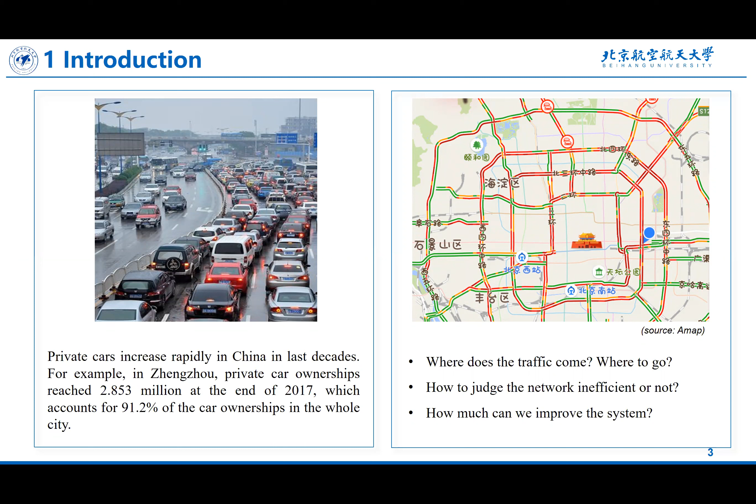Measuring OD level and citywide efficiency is helpful for managers to improve transportation planning, but it may not be realistic to improve efficiency for all OD pairs in the whole city. It's more reasonable to allocate a limited budget or resources to selected OD pairs, but how to select them, how to assign the resources?

From the system perspective, it may not be wise to induce demand for the most inefficient OD pairs directly. Just like playing pool, we usually don't kick the ball closest to the pocket—we need to calculate the angle and spin and think about the response of all the balls, hoping for more than one pot with just one shot. Based on this, we need to think carefully and choose a point to kick.

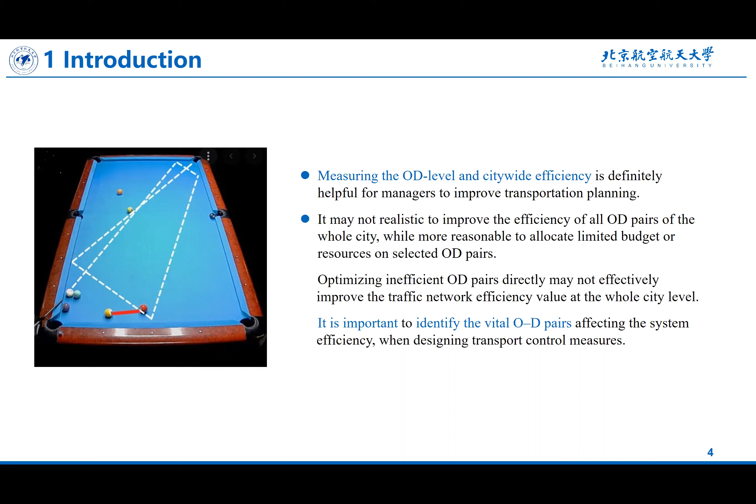In the traffic system, it's also important to identify the vital OD pairs or key OD pairs affecting system efficiency when designing traffic control measures. Here, vital means affecting the system the most, so we can do the least coordination work and achieve the most improvement of the system.

The existing work in the literature can be organized into two streams. The first is a commonly used framework called the excess commuting approach. It represents the additional commute, meaning how much excess is in the actual cost used. It is a ratio, as shown at the top. We have many extensions, like considering the maximum commute or the random commute.

The second stream is transportation network efficiency. It measures both the OD level and the citywide transportation efficiency by integrating the above excess commuting framework. Our work is based on these two frameworks.

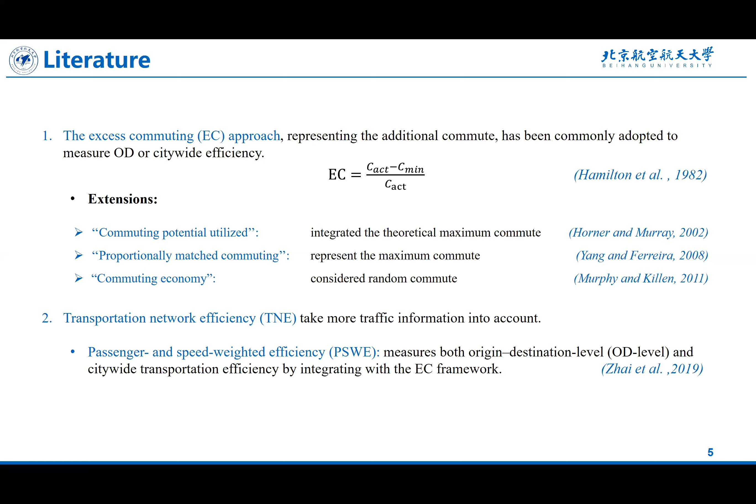The contribution of our work can be organized as follows: first, our study develops existing methods based on the EC framework to measure the OD level and citywide travel efficiency. We also proposed a new index to further identify the vital OD pairs for network improvement.

We used private car data in Zhengzhou to conduct the assessment. From the experimental results, we can see that the vital OD pairs do not coincide with the inefficient OD pairs. So from a system perspective, it is not wise to induce demand for the most inefficient OD pairs directly. We need to choose.

We also provide an analysis on the characteristics of these inefficient OD pairs to find the possible reasons for the vital inefficiencies from the perspective of land use. The results of this paper can help us design more targeted traffic management measures and urban land planning schemes to improve the efficiency of the traffic network.

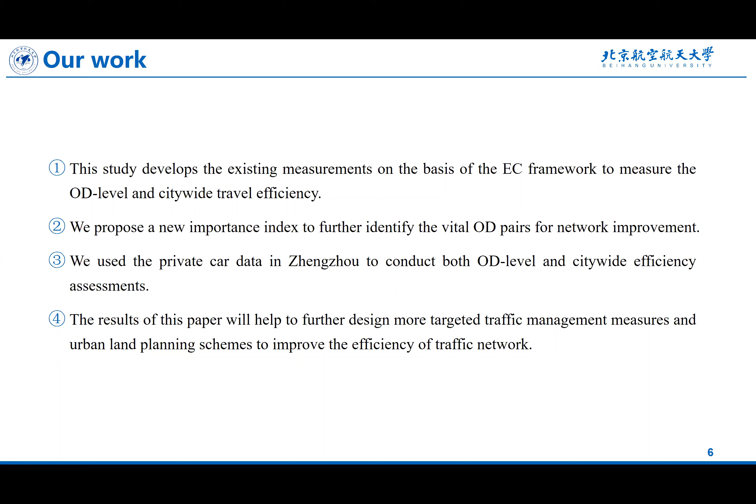The second part is about the data. First, Zhengzhou city is the capital of Henan province. On the map, it's located around the center of China.

The red point is the city, and it is 7,446 square kilometers in area, with 9.88 million in population. So you can see it is a very big city.

The data collected is in the gray part below. It's a built-up area with dense populations, consisting of three parts. Area A is the main urban area within the belt freeway of the city. Area B is Longhu town, a newly built-up area. Area C is the airport area.

Our data was collected from the 5th Urban Comprehensive Transportation Survey of Zhengzhou city. We have specific OD information for private cars on working days, around 25 days of data in 2017, collected from over 30,000 households.

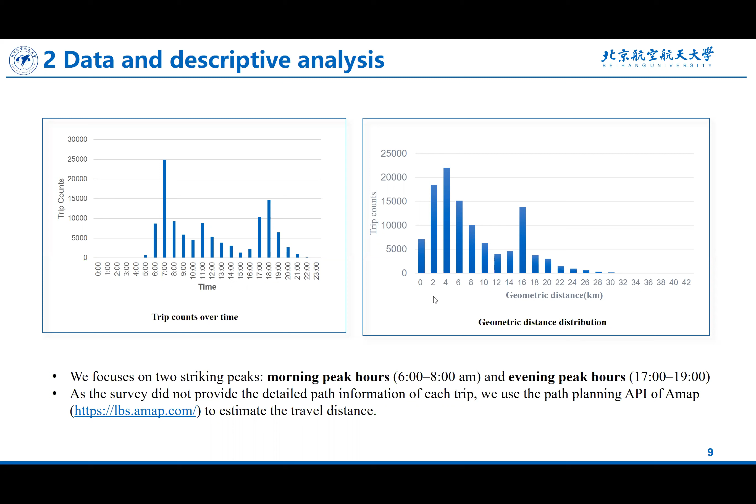Then we do the traffic zone partition in 2 steps. Step 1: we first divide the main urban area into 26 medium-sized zones by urban expressways and rivers. Step 2: we further divide the main urban area so that inter-zone trips are within a certain threshold.

As shown in the previous slide, the majority of trips are over 2 kilometers, so in the center part, the length of the zone is about 2 kilometers, such that the inter-zone trips are within 10%.

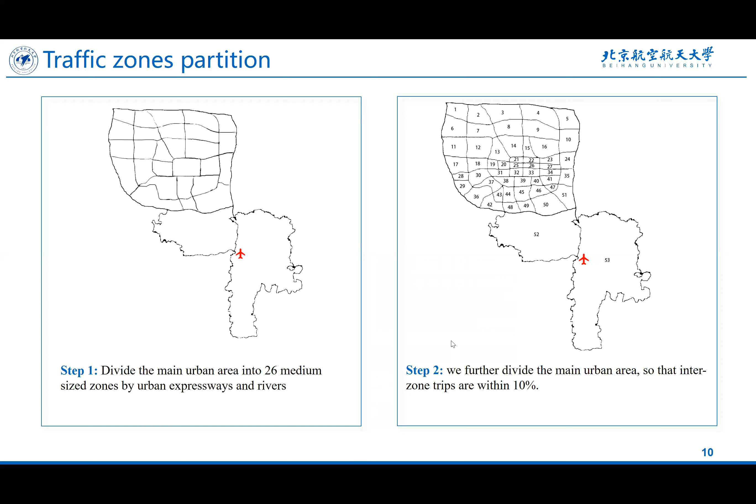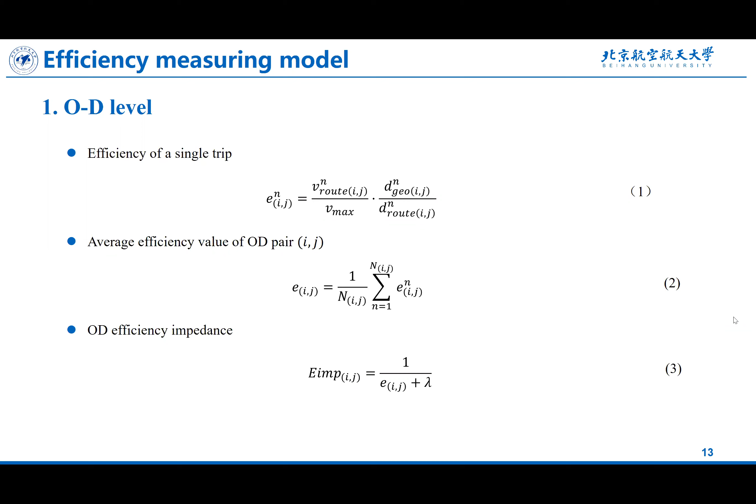The city level, we use the EC framework, the excess commuting framework. Here we use the ratio of the additional commute, which is the difference between the actual cost and the minimized cost. We use the ratio of this difference and the actual cost. So the EC value represents a proportion, actually the proportion of the excess cost of the actual cost. The high EC value means high cost exists in the system and low system efficiency.

This traditional EC calculation is cost-based. The EC value under different cost units can be obtained by changing the cost unit into the driving distance or driving time, or any combined cost. We will use this framework by replacing the cost unit with the impedance we just defined in the last slide, to measure the efficiency of the whole city.

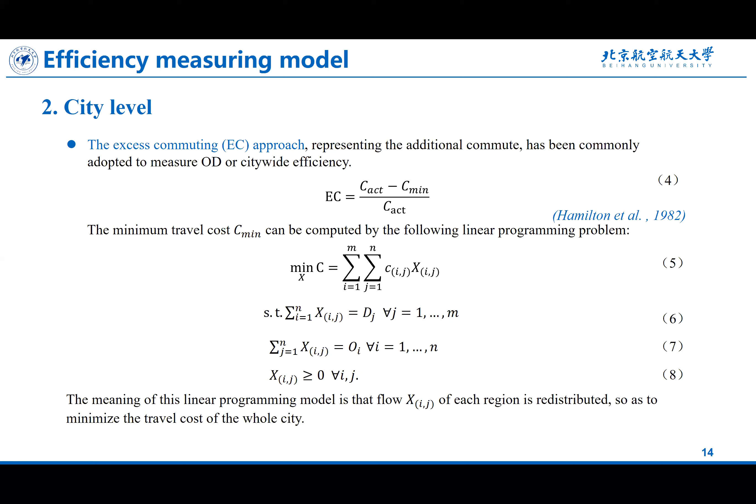And the vital OD pairs. As we said before, optimizing the inefficient OD pair directly may not effectively improve the traffic demand efficiency values at the whole city level. So it is important to identify the vital OD pairs affecting the system efficiency when designing transport control measures.

Here, the total travel cost of the entire city is defined as the cost times all of the demand, summed up.

But here we also introduce another new cost: the total travel cost in the absence of a single OD pair. So we exclude this typical OD pair out of the system and then calculate the cost again, to find what would happen if that OD pair's demand is excluded.

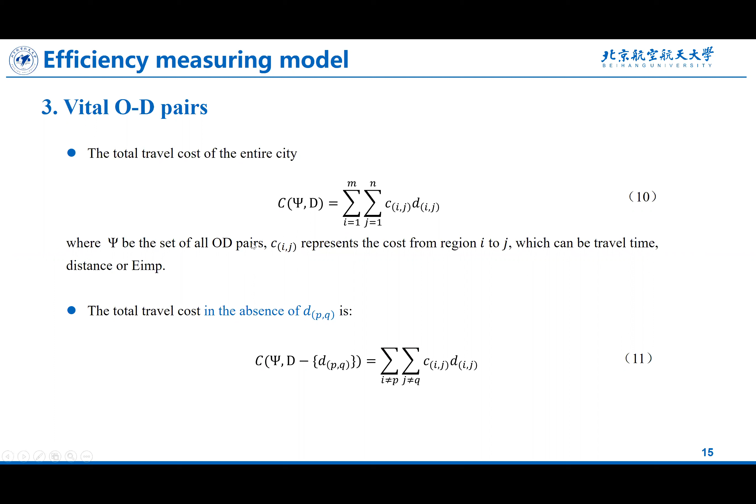And we also calculate the minimum total travel cost in the absence of this OD pair when the demand is excluded, to see what will happen, and we do the linear programming again.

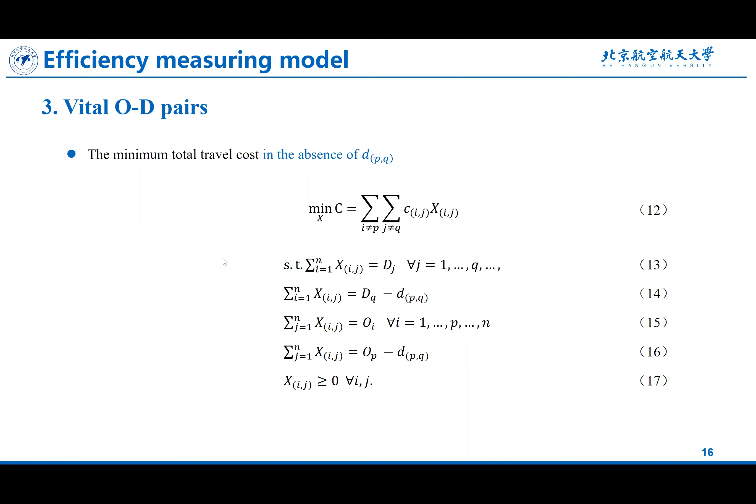Then the EC values are calculated in the absence of the OD pair. It is also the excess cost, but in the new situation. But on this basis, we define the importance index, which is the difference of the excess cost when this typical OD pair is in or out of the system, and we calculate the ratio of it.

So we can see the defined importance index can be positive or negative. The positive means that the value of the EC goes down and the system efficiency is improved when this OD pair is excluded.

The negative is the other case, where the EC value rises and the system efficiency gets worse when the OD pair is excluded. So the higher the absolute value, the more that specific OD pair affects the efficiency of the whole city.

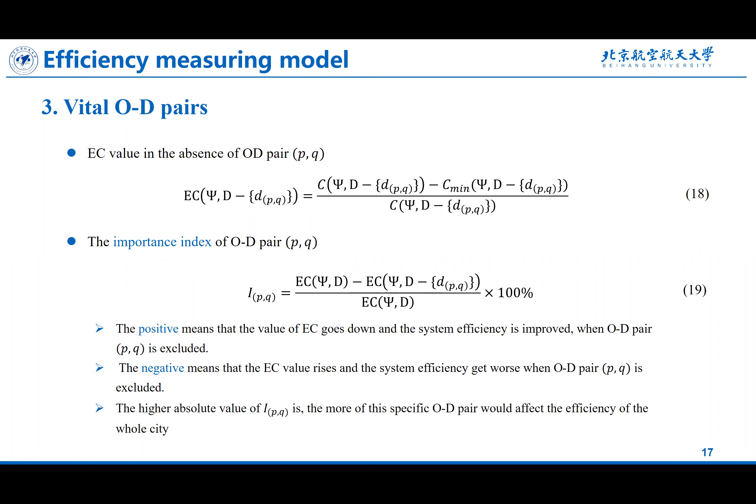So next is our result. First, we calculate the efficiency values for all the OD pairs. There are around 1,500 OD pairs in the network, and we find that the top 10% OD pairs have longer geometric distance and longer route distance. It means that vehicles traveling longer distance are more likely to travel more efficiently. And the distance ratio here of the high efficiency OD pairs is very high.

At about 0.95 on average. This means that these vehicles are traveling nearly along a straight route between these OD pairs, and are very efficient. The distance ratio of the bottom 10% OD pairs is relatively low, at 0.28 on average, which means that the vehicles may detour during the travel.

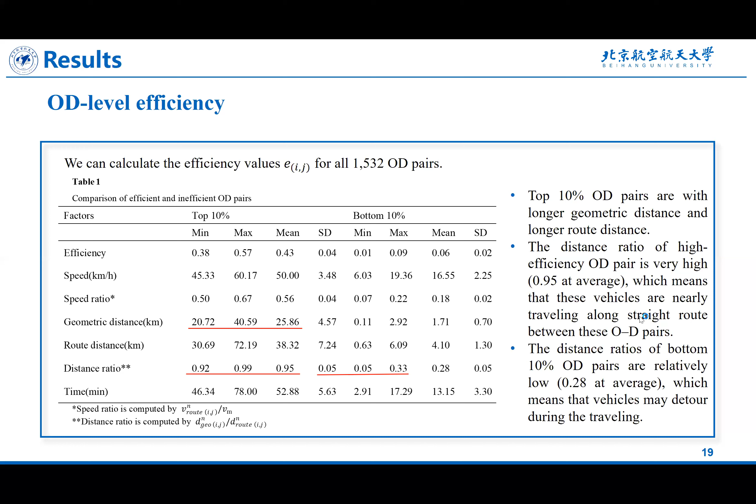The spatial distribution of the top 3% and the bottom 3% of the OD pairs. The high efficiency OD pairs mostly span and extend beyond the third ring road, which is the blue part on the left. So you can see the lines here. This high efficiency is often associated with long distance, and the low efficiency OD pairs are mostly distributed within the third ring road, the blue part.

So the drivers may experience intersections and traffic signals more frequently in the city center. So this will pull down the trip efficiency, while the long-distance trips are more likely to use freeways and attain higher average travel speed. So this means the city center is usually more congested, and the trips have to take more driving time, even though their traveling distance is very short. So this may be inefficient in the city center.

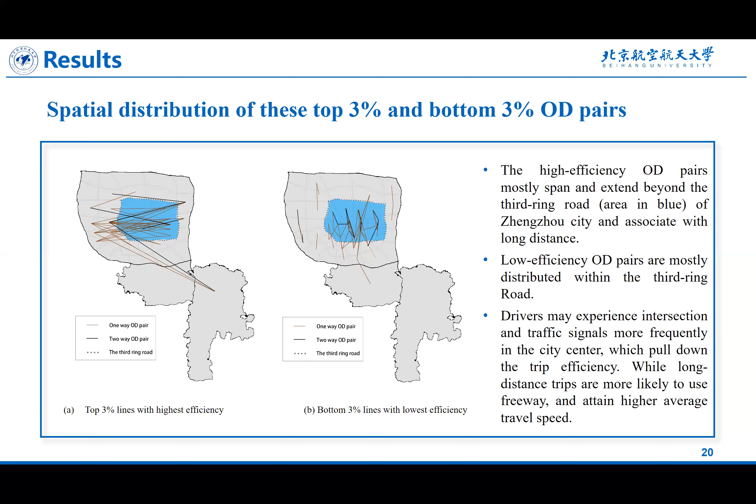For the citywide efficiency, we have such a table. We can see that the EC values are 33%, 51%, and 49% under different cost units of travel time, travel distance, and the combined one, EIMP. So this means that there is quite a lot of room for improvement.

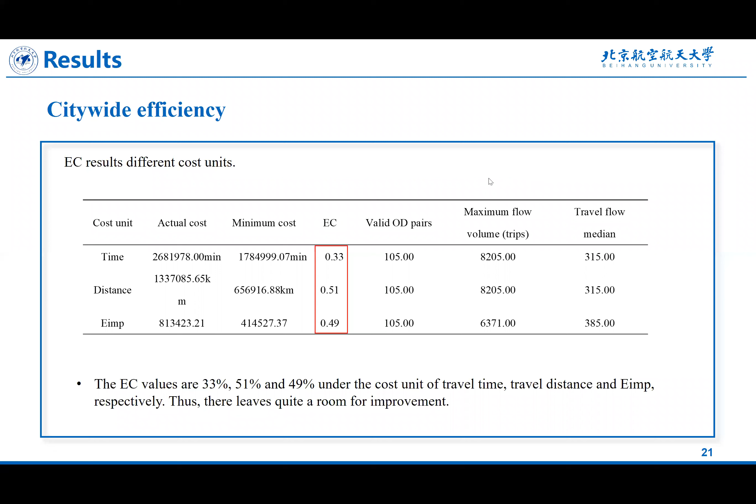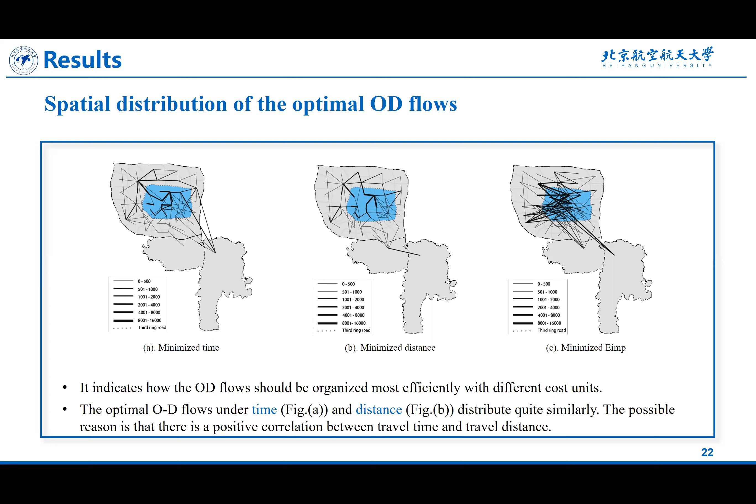This page shows how the OD flow would be organized to be the most efficient with different cost units. This is the ideal case. Next, we did a coefficient analysis between three cost units: the distance, the speed, and the EIMP. There is a strong negative correlation between the speed and the EIMP. Between the distance and the EIMP, there seems no significant negative correlation in all the OD pairs. But in the top 10% OD pairs, the most efficient ones, the distance factor is positively correlated with the EIMP.

This may be due to the fact that some drivers take a detour to avoid congestion. There is a similar work actually. They used data in New York, but that work didn't show an obvious correlation between the distance and the efficiency of the taxi drivers. But the data they used was taxi data, while in this study we use private car data. So the possible reason may be that taxi drivers have less concern about the driving distance than private car drivers when choosing a route.

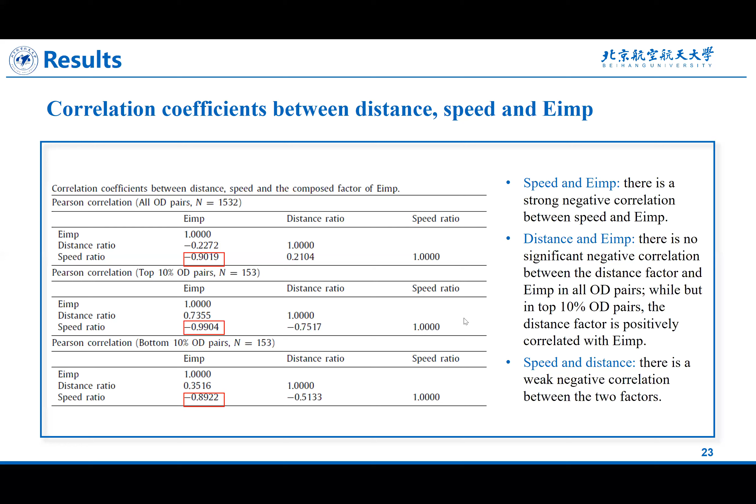For the vital OD pairs, we use our new index of importance to calculate them. We have these three pictures under different cost units: part A for travel time, part B for travel distance, and part C for the EIMP. The values of the importance can be positive or negative. Positive means that when the OD pair is missing, the EC value decreases, and the private car traffic network efficiency is improved. From the picture, the positive and negative importance values are roughly half and half.

We also calculated the correlation index of the efficiency and the importance, and found it is very low, around −0.075. So there's no significant correlation between the efficiency and the importance of a single OD pair. This shows that directly improving the inefficient OD pairs may not be a good way to improve the efficiency of the entire network. It will be more effective to alternatively improve the vital OD pairs. Thus, it would be good if we can identify the vital ones.

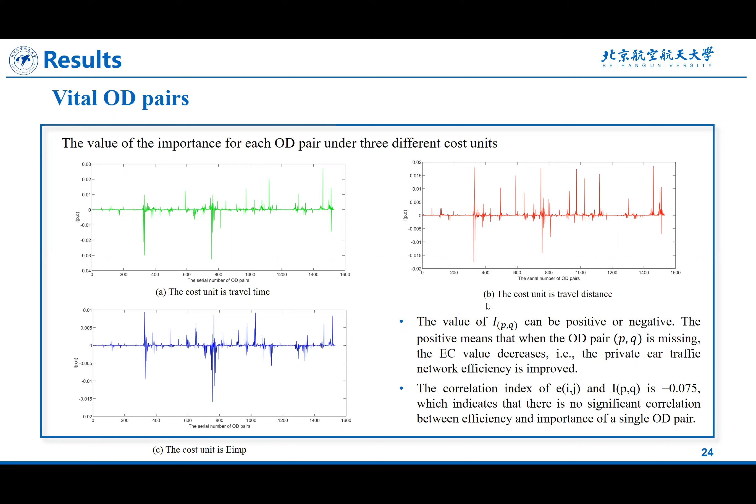The spatial distribution of the top 5% OD pairs with positive importance values. You can see that the spatial distribution in picture A and B are quite similar. Picture A is for travel time, and B is for travel distance.

We can also see some kind of correlation between these two. So the spatial distributions are quite similar, but for the combined unit of EIMP, the distribution varies greatly. It looks very different.

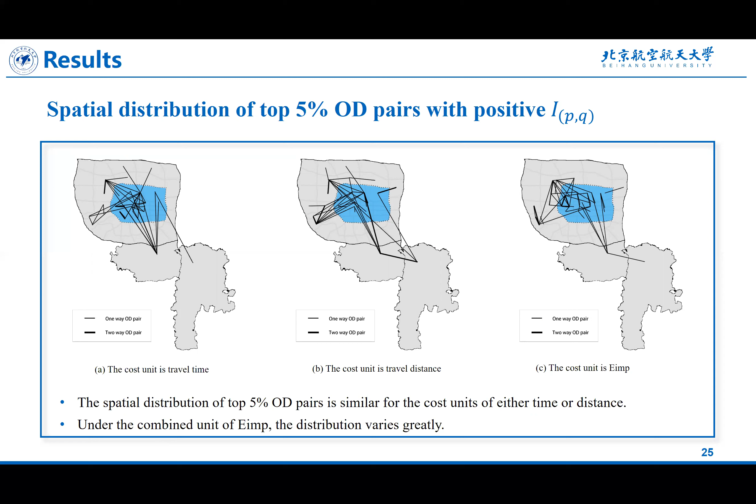As we have said, the vital ones and the inefficient ones do not coincide, but we can still have some that are both vital and inefficient. So here we rank the top 10 important OD pairs, and you can find some of them here. We list five. Five ones are also inefficient, within the bottom 10% inefficient.

So for the five ones, the number here is actually the number of the zone, here is 22 and 15, and the last four we have actually two pairs of OD pairs. Next, we will further discuss these three pairs, to discuss the inefficiency reasons of these zones with the land use information of Zhengzhou city.

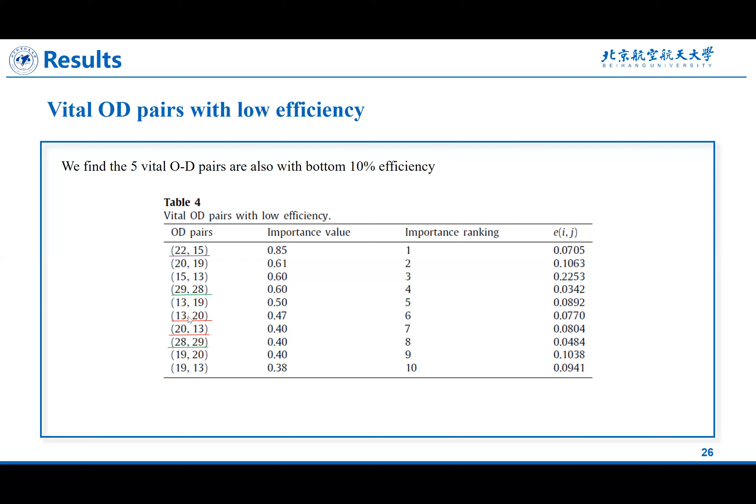Here first is zone 22 and 15. Here we have the values of the functional land rate. This means the land area of a specific function corresponding to each unit of residential land in the zone. Here we can see that zone 22 has significantly more commercial and financial land, and zone 15 is mainly residential

use. So we can see that a large volume of commuting demand would flow out during the morning peak hours and return during the evening peak hours. This would easily cause congestion during these two peak periods.

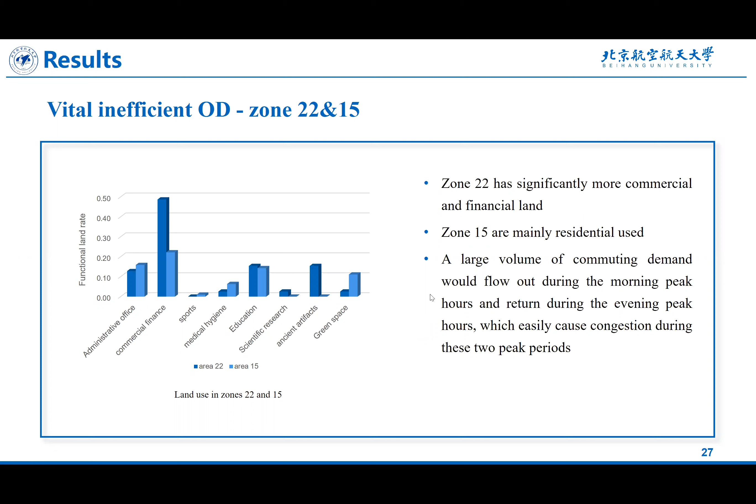Second pair, zone 20 and 13. Zone 20 has significantly more commercial and financial land, education land, and green space, while zone 13 is mainly residential areas. So due to the large number of residents and few schools in zone 13, people need to send their children to school in zone 20 during the peak hour. This is likely to induce low travel efficiency.

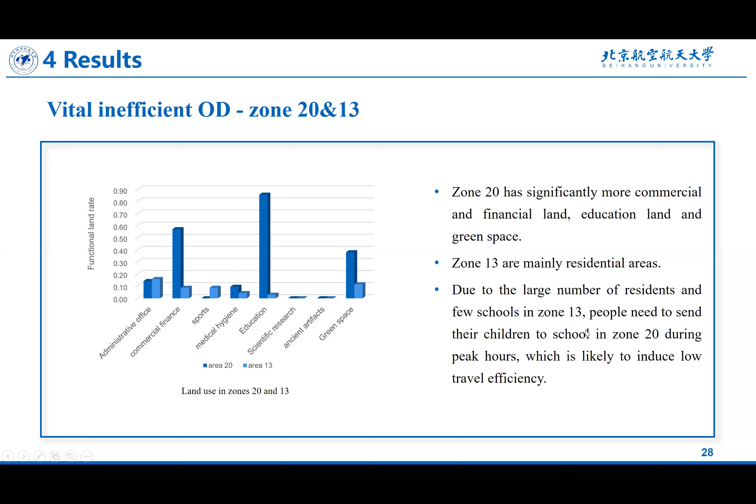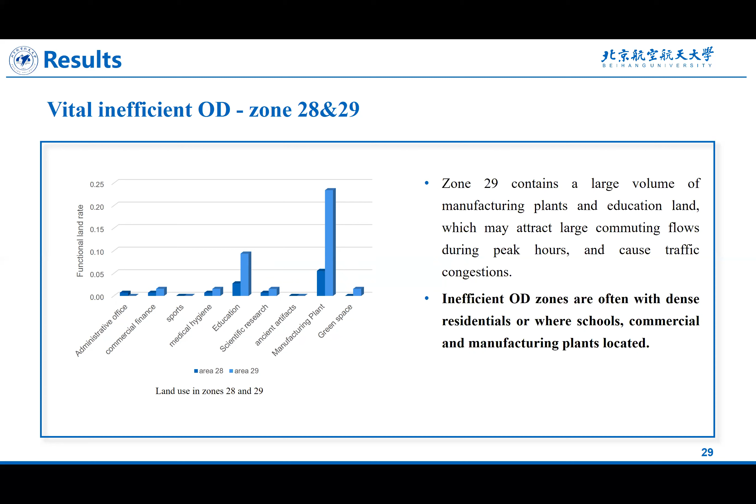The last is zone 28 and 29. Zone 29 contains a large volume of manufacturing plants and education land. So this may attract large commuting flows during peak hours and cause traffic congestion. So from the above, we can see that these inefficient OD zones are often with dense residential areas or where schools, commercial areas and manufacturing plants are located. So this we can see with the land use information.

Finally, we come to the conclusion. In this study, we developed existing models on the basis of the EC framework to measure the efficiency of Zhengzhou city, and we propose a new importance index to help us identify the vital OD pairs for network improvement.

Second, we did the assessment with the private car data in Zhengzhou city, and we considered three different cost units: travel time, travel distance, and the integrated unit of EIMP. The spatial distribution and the efficient and inefficient OD pairs are illustrated with maps for practical insights. We also did some correlation analysis and found that the speed factor has more impact on efficiency compared to the distance factor.

Third, we also quantify the importance level of the OD pairs, and through analysis with the land use information, we find that the inefficient OD zones are often with dense residential areas or where schools, commercial areas, and manufacturing plants are located.

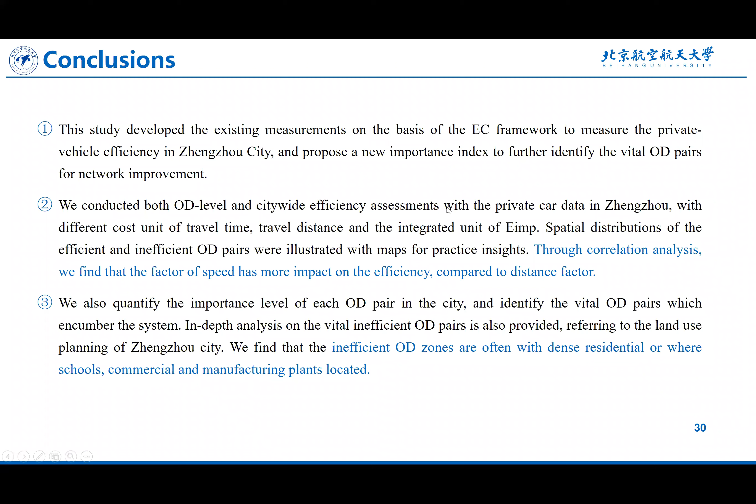We also have some limitations. First, we only use the private car survey data, but it may be more insightful if we combine it with public transportation data, as public transportation will have an impact on residents' travel behavior and consequently on the traffic network efficiency of private cars.

Second, this study doesn't involve specific road segments. We only use the information of the origin and the destination. So only the inefficient vital OD pairs are given in this article. Planners may be more concerned about specific road segments, and this would be more interesting if we have

relatively more specific data. Third, when exploring the reasons for the vital inefficient OD pairs, we speculate the travel purpose of each zone just through the land use information. This will inevitably cause some errors.